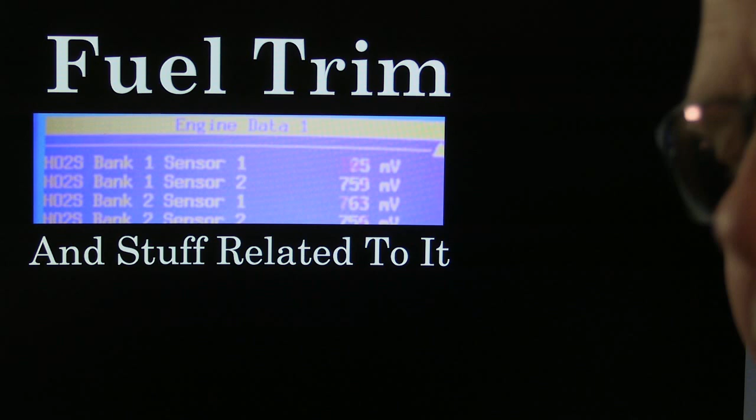This week I decided to do a little presentation on fuel trim and some related stuff. Fuel trim used to be called block learn and integrator. Block learn used to be long fuel trim back in the day - they didn't call it that, but they called it block learn. What we call short fuel trim these days used to be integrator. That goes way back. But the simple fact is that the integrator and block learn, and the short fuel trim and long fuel trim, you cannot measure those anyway except with a scan tool. You have to have a window into the computer's thought process before you can figure out what those things mean.

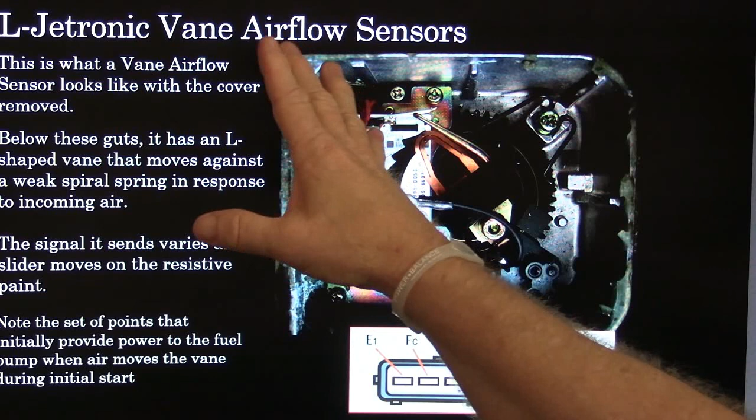Now, some of the earliest fuel injection systems I got involved with - this is a Nippon Denso, on an '85 Toyota vane air meter. This spring-loaded flap has a calibrated spring. There's an L-shaped flapper that air goes through underneath all this, connected to this wiper, and as air comes in it moves this way. You might notice this little rod has points - those points actually drive the fuel pump. When you start spinning it over, this moves just enough to let those points close, the fuel pump kicks on, and you're basically getting something like a throttle position sensor, only measuring airflow. They call this L-Jetronic because the vane was shaped like an L, presumably.

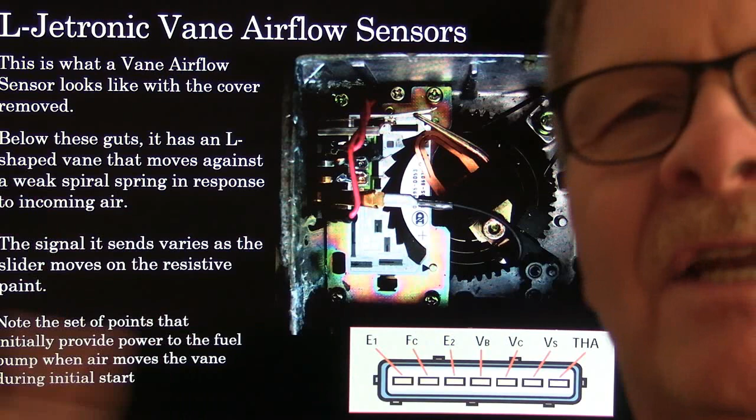I had pulled the top off this - actually somebody had already pulled it off, so it was easy to lift off. This was on a Toyota we were working on that had a strange idle problem. According to the measurements I got and the Toyota book, this wasn't reading right, but when I checked the cost - this was 20 years ago - one of these from Toyota was $800. So I said we didn't need to buy that, and we found the problem somewhere else. If you just went by the numbers in the shop manual, we would have replaced this. But we found it was a coolant flow problem through the idle air control valve, which Japanese vehicles for years - some still do - used hot coolant running through a wax pellet along with an electrical circuit for idle air control, making for like a $500 idle air control unit.

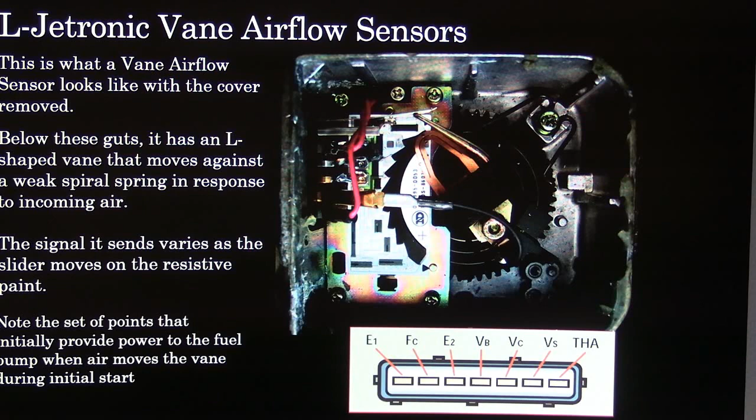This slider, as it goes up, increases the voltage, which helps with your fuel injection and all that. The set of points that provide power to the fuel pump, once again, are right there. So if you're going to unplug this and run the vehicle, you have to bypass the two terminals - jump power to the fuel pump by bypassing them. I don't remember which terminals these were or how this little code works - you've got to have the book in front of you before you'll know what each one means.

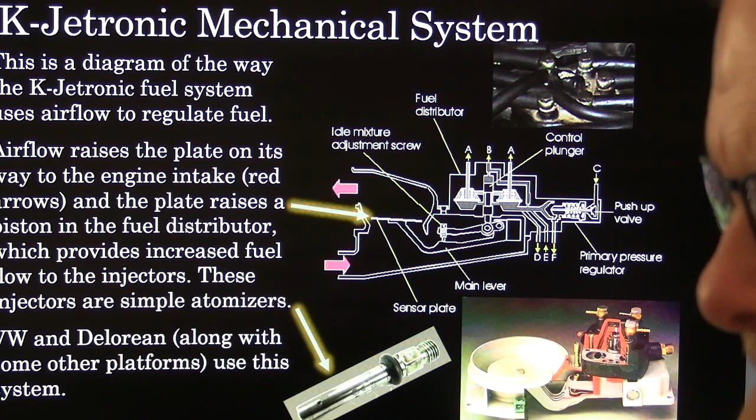Now this is a diagram of K-Jetronic fuel injection, which uses airflow to regulate fuel. It's totally a mechanical system, initially came out in the late 70s as I remember, on the Volkswagens, and I was working at the dealer on these. DeLoreans have this kind of system too, in case you're ever wondering what a DeLorean has for a fuel system. This fuel distributor - if you ever take one apart and put it back together, you're never going to get it to seal up or work right. Those things are assembled in a laboratory, and the tolerances are in microns - it's incredible. Those little slits in the tube that the valve slides up and down in have to be cut with a laser. I don't know how else they'd cut them.

But the simple fact is, this plate right here has a little piston sitting on it. As the air comes in and raises that plate, it raises the piston, and that sends more fuel out. These little atomizers are pretty cool - see the big fat O-ring on there?

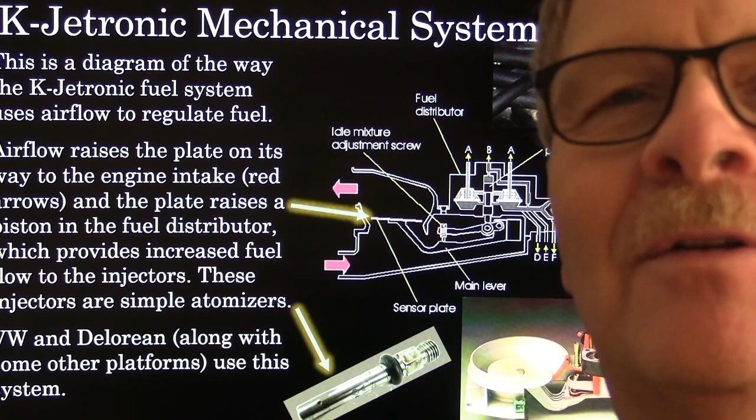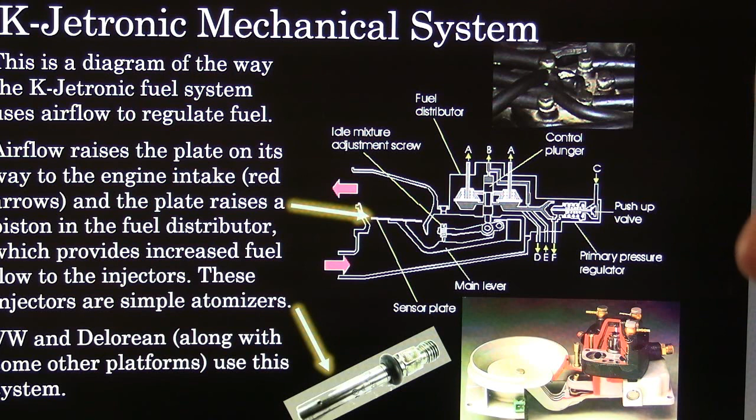They just snap into a little plastic piece that's screwed into the head right there. It's real easy to pop them out and snap them back in, and put a little motor oil on the O-ring. That O-ring keeps it from having a vacuum leak. You could actually pull those out and put each one in a bottle, operate the fuel distributor with the fuel pump running, and watch the fuel. It's a constant mist, not like your old GM system with the poppets.

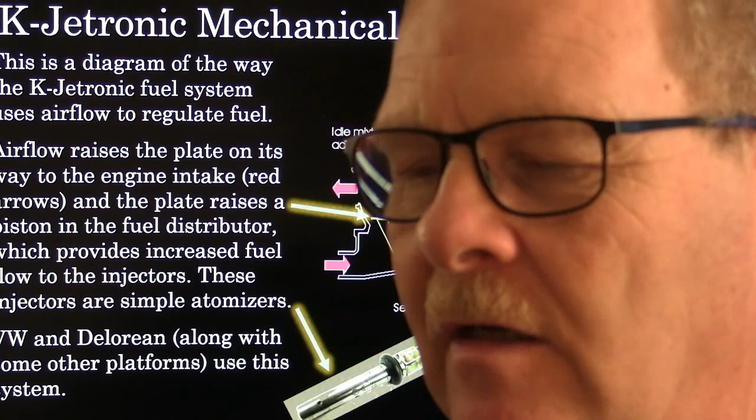There was a little adjustment right here, the adjustment screw. What we would have to do on Volkswagens—well, nope, I got that crossed up with the one that's got the vane airflow meter on it. Scratch that. On the one with the vane airflow meter, you would do adjustments on it until you were reading 1% carbon monoxide, which sounds like a lot, but back then it wasn't all that much by the spec.

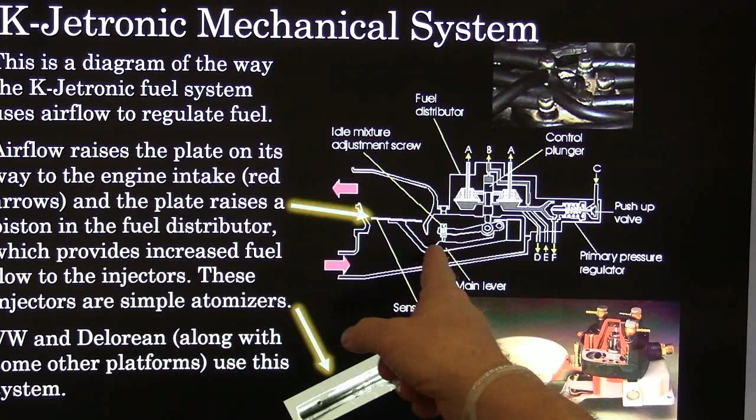But this little mixture screw right here, you'd pop a little plug out, and it was usually an Allen—they show a screw there, but it was an Allen—and it's right here, see that? It goes down in there. So anyhow, that's how that kind of thing worked. I kind of enjoyed working on those. They were a lot of fun.

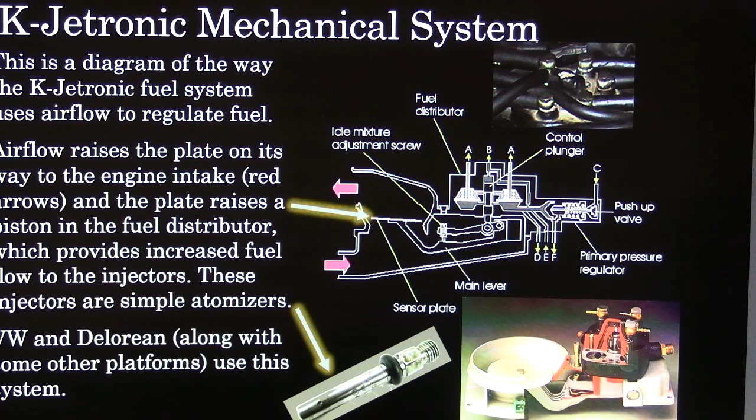This is the way they were wired up. They had a warm-up regulator, which was basically a bimetal thing. You see how this fuel is going in on top of that piston? Whenever the warm-up regulator was cool, it would have lower pressure to counteract the upward motion of that piston as raised by that plate, and that would let it run a little richer. As it warmed up, it would increase that pressure to counteract it. It's almost like in a transmission, line pressure or governor pressure pushing back and forth against each other. That's why you see that warm-up regulator like that.

But you've got an auxiliary air regulator made in a very similar fashion, and it would let extra air go around the throttle plate when the engine was cold until that little bimetal strip warmed up and closed it off. That seemed awfully mysterious to me until I got a little training on it.

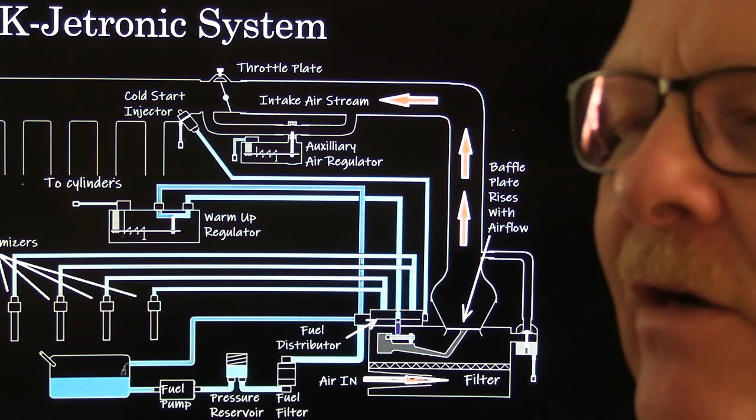Here's your cold start injector, which is there for that extra fuel I was talking about a couple weeks ago that you need for cold start—it does the same job the accelerator pump used to do. That was before they figured out they could put extra fuel in there other ways. A lot of vehicles had a cold start injector to make it start better. There's your little atomizers coming out of the fuel distributor. So this came in, raised that up, pushed that little piston up, and let more fuel go through those metal lines, which were braided metal lines too.

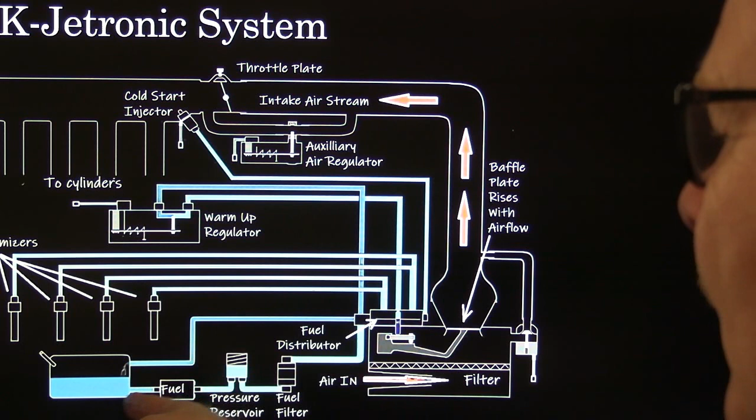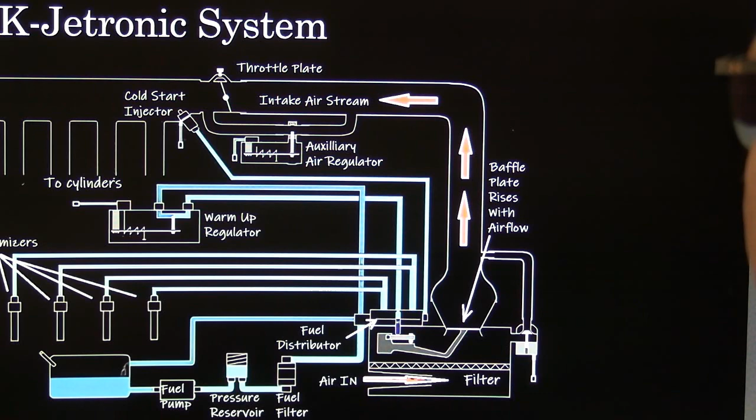They're really made well. Now you had a pressure reservoir here, which was kind of like an accumulator, and a fuel pump. Notice how they like to feed that fuel pump with gravity—they put it down low so it can be gravity fed from the tank. And then there's your fuel distributor right here, which is that thing I was showing in that other slide earlier.

All right, now today's mass airflow strategy. Mass airflow has priority on this particular system. The MAF system doesn't need to know anything about throttle position, exhaust gas recirculation, EGR flow, or any of that—it's just basically reading air.

If these things get dirty so that they can't respond quick enough to that air, you're going to have sluggish acceleration. I've had vehicles come in and they said it's not accelerating right, and I would just spray that and clean it off, and everything would be crisp again. A lot of people clean those.

The thing about it is they shouldn't get dirty if you're changing your air filter regularly, because the air filter filters the air that's going across these, and if there's crud on those, there's something getting past the air filter, and that indicates the problem right there.

Now they've got a cold wire that keeps track of the ambient temperature, and a hot wire. The sensor heats above that ambient temperature to maintain a constant temperature above the temperature of the cold wire, usually 300 degrees Celsius or something like that. And the mass airflow signal is calculated based on how much current it takes to maintain the temperature differential between the cold and the hot wires. There's a whole bunch of different ways they look, but that's just one of them.

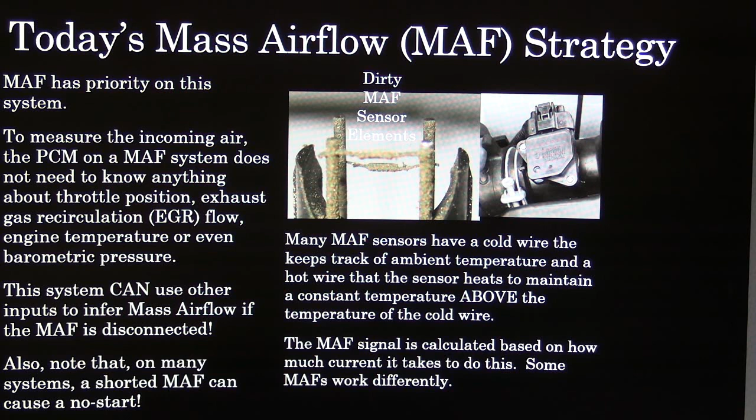And some of your diesels now have got mass airflow sensors on them too. This system can use other inputs to infer mass airflow if the mass airflow is disconnected, but I've seen shorted mass airflow sensors completely shut the system down where you'd have a no start because of the mass airflow.

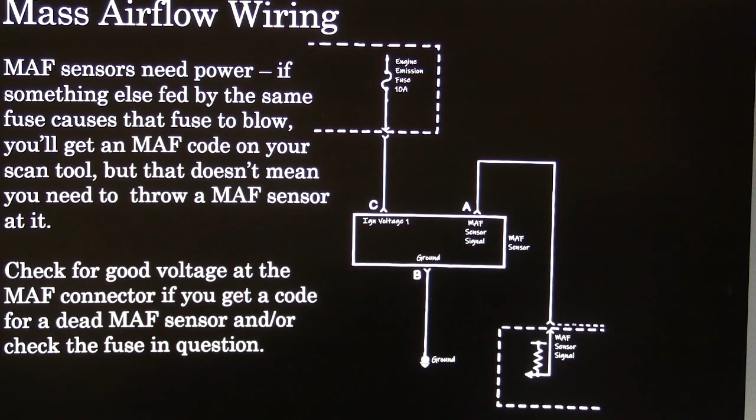Now they need power. If something else fed by the same fuse causes that fuse to blow, you'll get a mass airflow code on your scan tool, but that doesn't mean that you need to throw a mass airflow sensor at it. Case in point, we had this Chevrolet pickup, had mass airflow on it, had a mass airflow code on it, and we replaced the fuse, and it popped as soon as you turned it on.

Now there's power going to the 12 volt power going to the mass airflow sensor. And so I put my little circuit breaker on there with a light bulb wired parallel to the circuit breaker, and it would go ding ding ding ding ding ding. And whenever we would unplug everything we found that was fed by that...

When we got to the downstream oxygen sensor on bank number 2, which was the right hand bank on that Chevrolet, our short went away. It turned out we had a shorted out oxygen sensor heater that blew the fuse, but we were getting a code for a mass airflow sensor, so don't fall in a trap like that just because you're getting the fuse blown.

If you've unplugged the mass airflow sensor and it still blows the fuse, and you looked at your wires, you need to start unplugging other components. I always like to do the easy thing first, but we wound up putting an oxygen sensor on that one to fix the mass airflow sensor code.

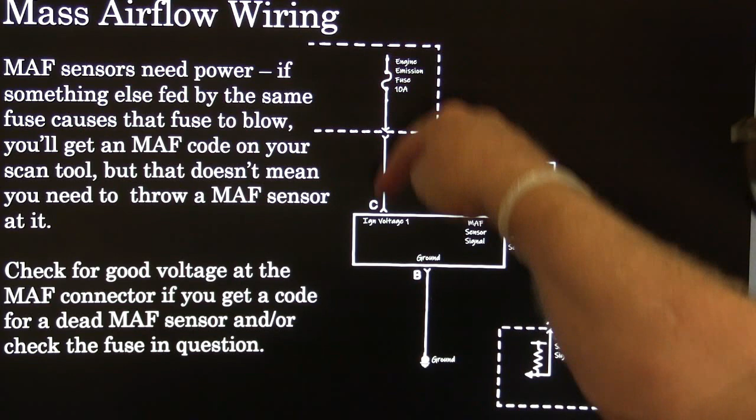Check for good voltage at the mass airflow connector if you get a code for a dead MAF sensor, and check the fuse in question. This is a very simplified schematic I put together of that. Ignition voltage, mass airflow signal coming in, and ground coming in from the bottom. That's really the way I think that ought to be drawn.

Now, unmetered air leaks refers to any air that enters the engine without first passing through the mass airflow sensor, like we do here. We talked about that last week.

The PCM figures fuel delivery based on mass airflow readings. Any air that goes in there that's not going through the mass airflow sensor is going to cause it to put not enough fuel in there, and your fuel trim readings are going to go positive. So it's going to be an out of balance fuel mix because it's going to pick it up as a lean condition. Basically, that's why your fuel trims will go to the plus side of zero when you're looking at your fuel trims.

It'll start out, the short fuel trim will go first, and then the long fuel trim will follow it. If the short fuel trim kind of maxes out, the long fuel trim keeps going up. A lot of times, though, if you go in there, you'll see the short fuel trim on 0 and the long fuel trim at like 28% or something like that. That means the long fuel trim has adaptive learned to the point that it has the short fuel trim back on 0 again, that's its desire, to keep that thing running really clean, even though it's having to twist it way out of balance to keep it there.

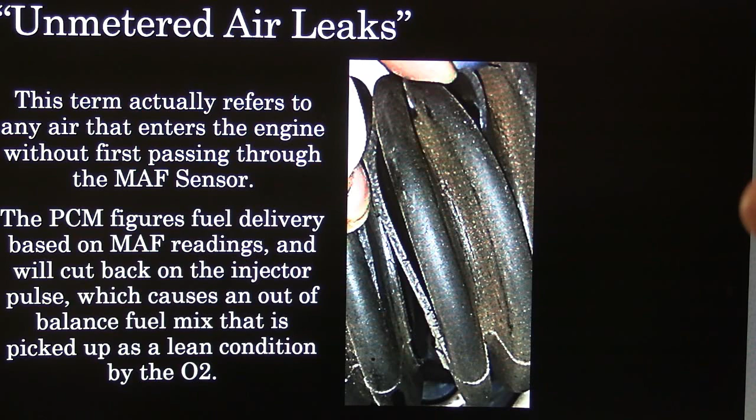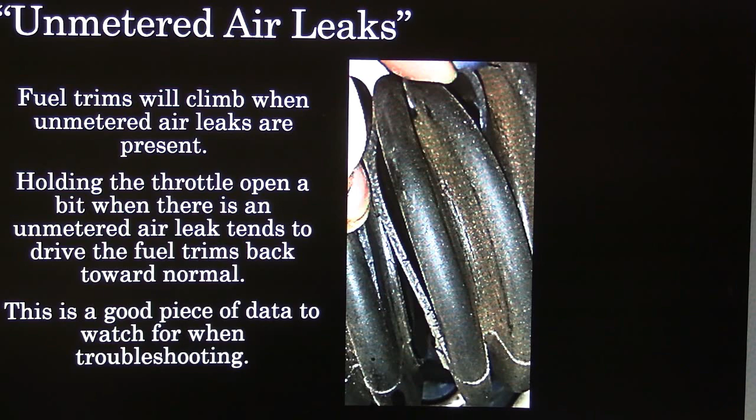Pay attention to these things and other leaks between the mass airflow sensor and the throttle body. Any air getting in there that's not being run through that mass airflow meter is going to cause a problem with your fuel trims. They'll climb when unmetered air leaks are present. It's like holding the throttle open a bit when there's an unmetered air leak, and that drives them back toward normal usually. It's good data to pay attention to.

The PCM can only change the amount of fuel in the mix. The incoming air may be altered by a clogged filter, but on some vehicles, like some Lincolns and this Lexus SC300, whenever you start spinning the wheels, their traction control system kicks in. You can barely see it, but this is a throttle plate down on the bottom that opens whenever you open the throttle with your foot.

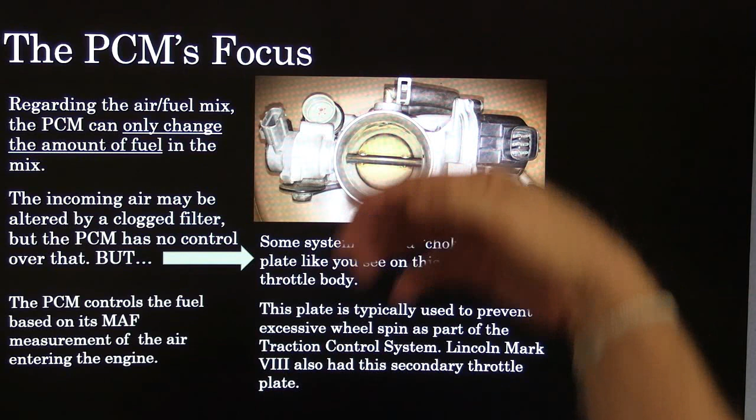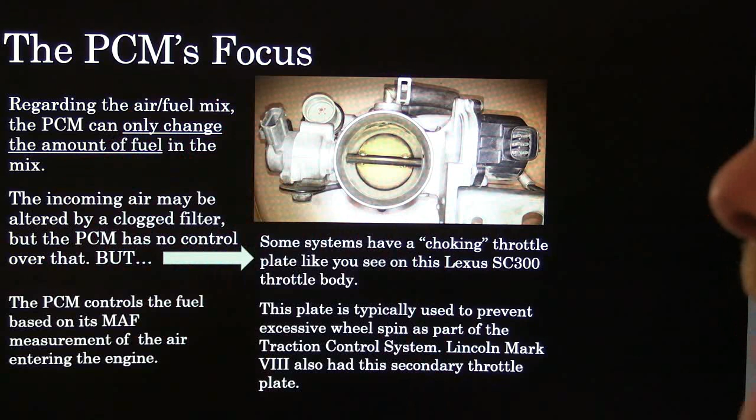If you get that thing spinning its wheels and the electronics pick up on that, this throttle plate you see right here, looking straight at you - I should have had it turned so you could see it better - will begin to close off and stop your airflow, or regulate it automatically so you're not spinning the wheels too much. It controls fuel based on its mass airflow measurement of the air entering the engine, though. That was something I thought was very interesting, that Lincoln and Lexus both do that. If you guys know of another one that does that, let me know. Those are the only two I've personally experienced with that secondary throttle plate that closes off if you're doing something naughty.

Why do fuel trims go positive when the oil filler cap is removed with the engine running? If you pull that oil filler cap off with the engine running and you're watching your fuel trims, you'll see those fuel trims immediately start to climb. The reason is it starts to read lean because the PCV system is pulling air out of the crankcase all the time.

The little breather hose is downstream of the mass airflow sensor, and the air that goes through the mass airflow sensor is filtered and clean because it's already gone through the air filter. This one doesn't have a separate crankcase filter - it uses the air filter for the crankcase filter too, which is really smart. It pulls that air through the crankcase to get rid of the blow-by from the piston rings and out into the intake plenum, and then it processes it.

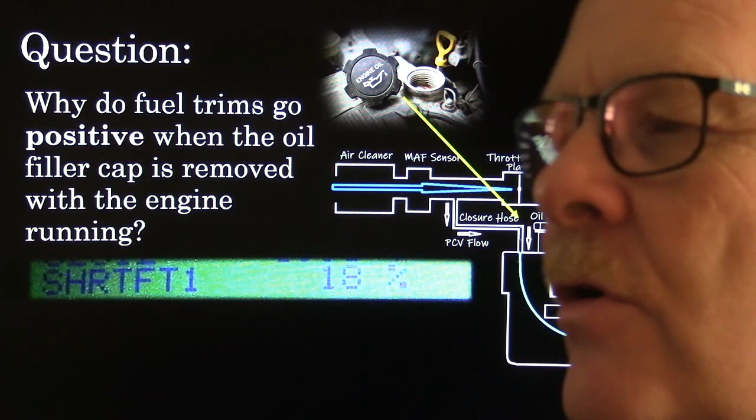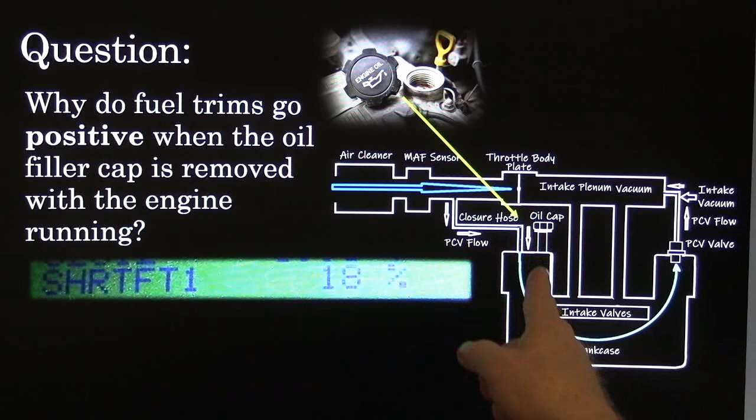The PCV system is the oldest emission control that I know of, and it first appeared in the early 60s on Corvairs. Now, this situation happens because when you take that oil filler cap off, air is going to be coming in there. The PCV system is going to be pulling air through the oil cap opening, and that's going to cause the fuel trim to climb.

So here's something to consider: if you've got an oil filler cap with a damaged seal so air can leak past it, or sometimes the seal has just come off, people feel like if oil's not splattering out, they can just screw it back on and be alright. But I've actually seen some engines where, because of the way the system is designed, if somebody leaves the oil filler cap off by accident, it will throw every last bit of the oil out of there and lock the engine up. That doesn't happen on very many platforms, but I've seen a couple that will do that.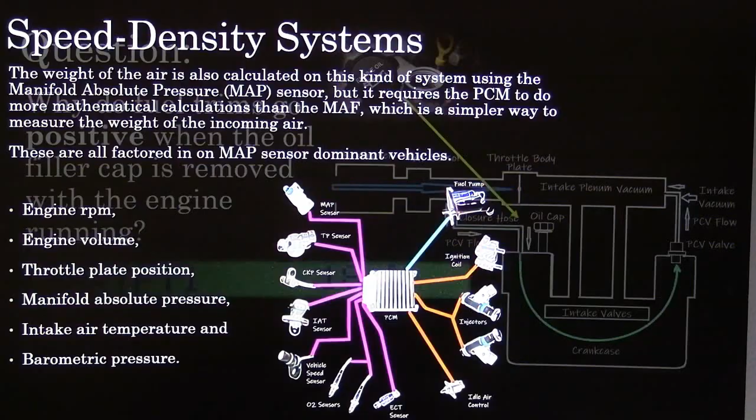On a speed density system, the weight of the air is calculated using the manifold absolute pressure sensor, or MAP sensor, but it requires the PCM to do more mathematical calculations than mass airflow, which is a simpler way to measure the weight of the incoming air. These factors are all used on MAP sensor dominant vehicles: engine RPM, engine volume, throttle plate position, manifold absolute pressure, intake air temperature, and barometric pressure.

Engine coolant temperature is not listed here, but it's factored in too - I just fooled around and didn't put that as one of my bullet points.

But the thing about it is, intake air and engine coolant are always going to be factored in anytime you're running the engine on any of them, mass airflow or MAP. They're always going to modify the pulse width. Barometric pressure will always modify the pulse width. Throttle position and how fast you're opening the throttle will have something to do with that too.

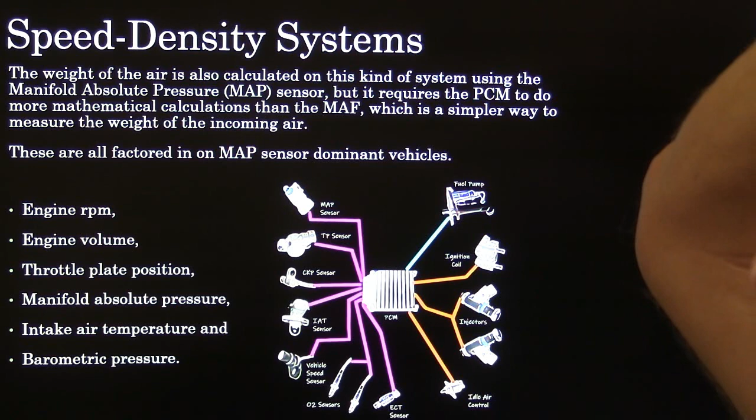Engine volume means engine displacement, it's volumetric efficiency. Like your 3-liter engine is supposed to, if you turn the crankshaft 2 turns, you're supposedly moving 3 liters of air through there, but that's not the way it is because the air's got to make so many curves going through there that your volumetric efficiency is not going to be 100% unless you're running a supercharger or a turbocharger. Of course, RPM's got something to do with it too.

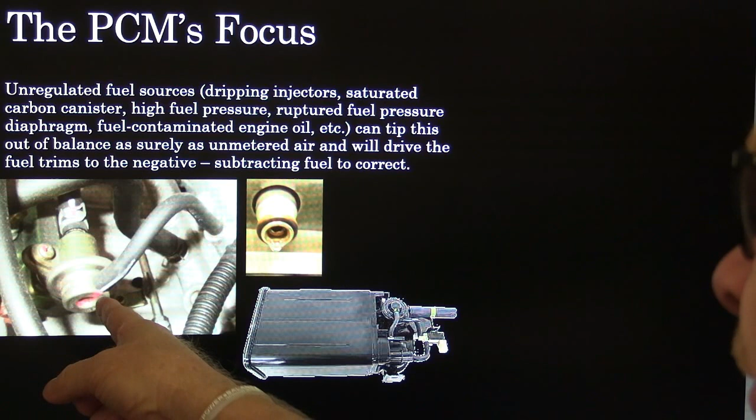Unregulated fuel sources, which is dripping injector, saturated carbon canister, high fuel pressure, ruptured fuel pressure regulator diaphragm. If you pull that hose off that fuel pressure regulator and there's fuel in it, that diaphragm is ruptured, and if that gets bad enough, it can actually hydraulic lock a cylinder. If enough fuel pressure keeps trickling in there, like on a hot day, you've parked it, fuel starts going into the intake manifold, there's an intake valve open, it starts dripping fuel in there, and if it gets enough fuel in there, I've actually seen this happen before, an engine was destroyed because this little diaphragm busted and it leaked in there.

And of course, if you got a saturated carbon canister, because somebody topped off the gas or whatever, it's also going to make it run rich. Dripping fuel injectors will typically be more likely to cause a hard start problem than they will a rich running problem. If you've got engine oil that's contaminated with fuel, it's going to be pulling through the PCV system. It's going to pull fuel vapors, and that's going to skew your fuel trims.

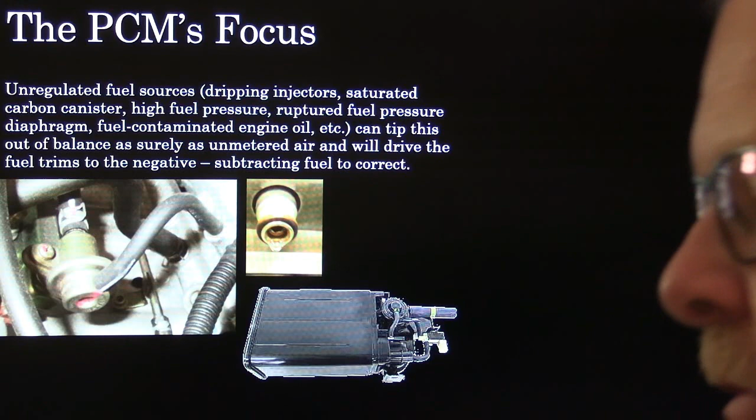One of the things they used to tell us in the very old days on Fords was, if you have one that's reading rich, the first thing they want you to do is pull the PCV valve out of there and put a piece of paper over it. If the fuel trim normalizes, that means that you need to change the oil before you do anything else.

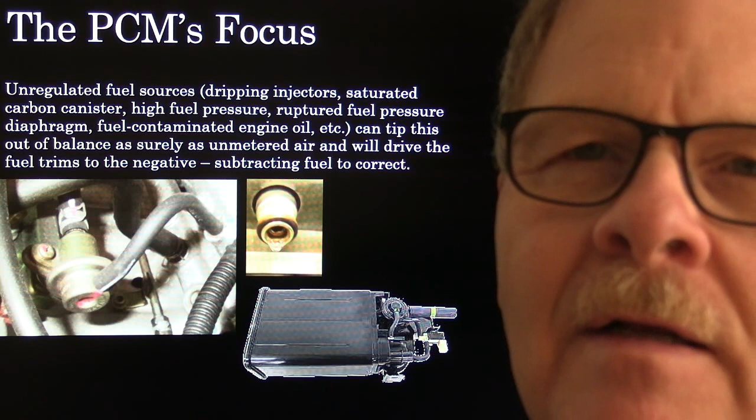Because sometimes you have enough fuel contamination, even if there's nothing else wrong with the vehicle, if you have gone a long time without an oil change, a lot more than you should have, you're going to have fuel contaminated oil. Basically, it's going to depend on the driving habits of the person that's driving the car and all that. But it's really kind of crazy to throw a bunch of parts at one when an oil change would have straightened it out. A lot of times you're looking for a reason for a check engine light code whenever you're doing this anyway.

Short fuel trim is an instantaneous fuel pulse width adjustment to what the O2 sensors are telling the PCM. The long-term fuel trim is the adaptive memory part of the picture, and follows short fuel trim, which makes coarse adjustments. In other words, the long fuel trim makes coarse adjustments for the fuel delivery when short fuel trim, which is instantaneous, wobbles too far out of line.

If short fuel trim goes up, and it's going up too fast, and it can't correct the concern, the oxygen sensors are still reading what they were, then the long fuel trim starts to ratchet it up in steps, and it happens a lot slower.

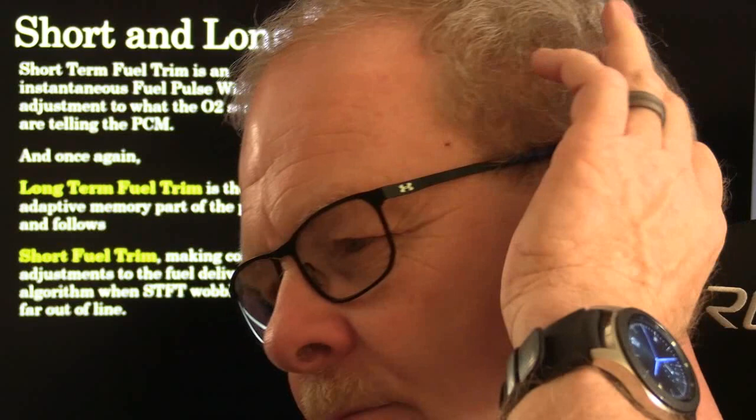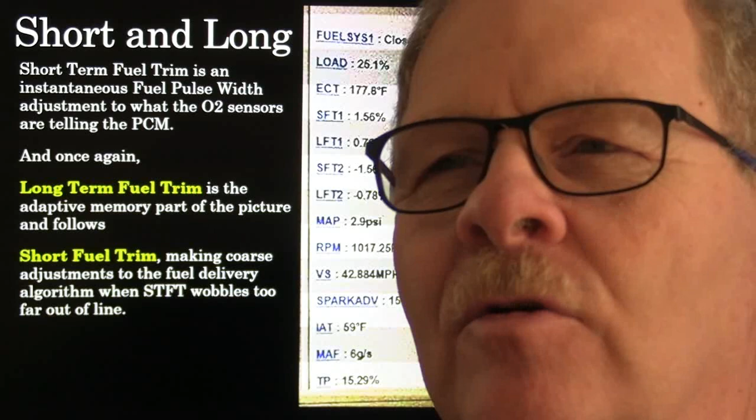See, this one right here, you might notice has basically got mass airflow and MAP. Now, what you're looking at with MAP, a lot of times you'll read on the scan tool, it'll say intake manifold vacuum and manifold absolute pressure. Now, manifold absolute pressure, when you add it to the intake vacuum reading, is going to give you a figure that's equal to barometric pressure.

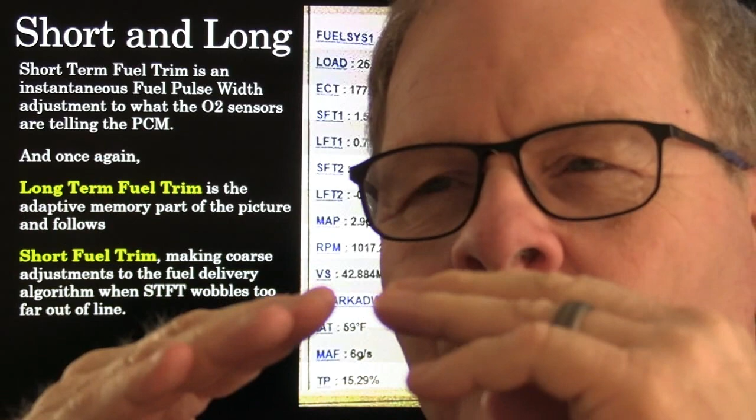Barometric pressure is divided between manifold absolute pressure and vacuum because they're two sides of that same coin. It's a seesaw.

Short fuel trim 1, this is like a 2-bank engine. Long fuel trim, see how this is really close to 0? This is like it's supposed to be running. That one's just below, this one's just above, this one is just above, that one just below. Notice how they're both floating along there together. There's your RPM, that's a little more than idle. You've got just a little bit.

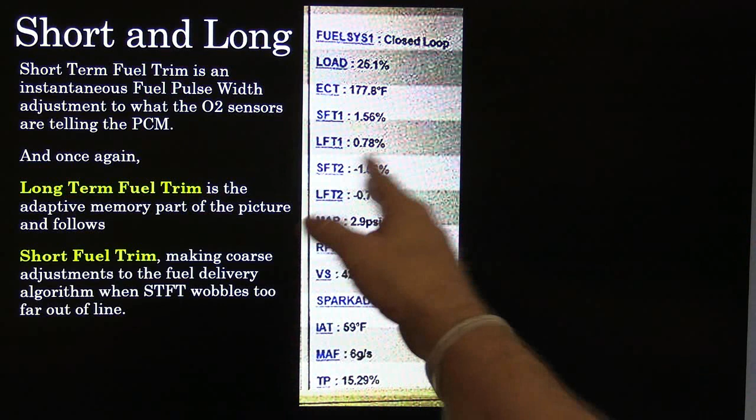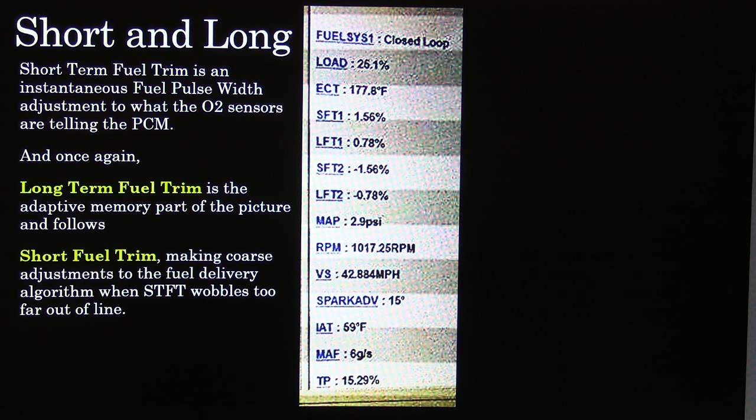Your closed loop fuel control is important too, because if it's not paying attention to the oxygen sensors, then your fuel trims are going to be figured by something other than the oxygen sensor. We're driving 42 miles an hour here too. Spark advance at 15 degrees. All right, that's about all I got to talk about there.

Engine coolant, you notice, is 177 and intake air temperature at 59, which is what you expect in a normal situation. You won't always see the problem with a scan tool.

Now, there's a lot of people that like to spend a lot of time enjoying the cool AC with the engine running, sitting in the car, pretending to look at the scan tool screen. There's only so much you can figure out that way, and pretending to work on the car while playing on your phone is not helping either. I used to have to tell my students about that.

There's an exhaust restriction downstream of the catalyst, like an internally damaged muffler with a baffle blocking its outlet, so the engine can't breathe out. Can we find that with a scan tool?

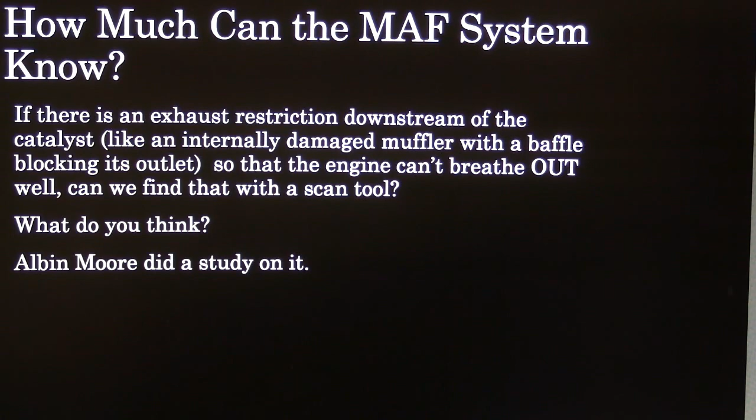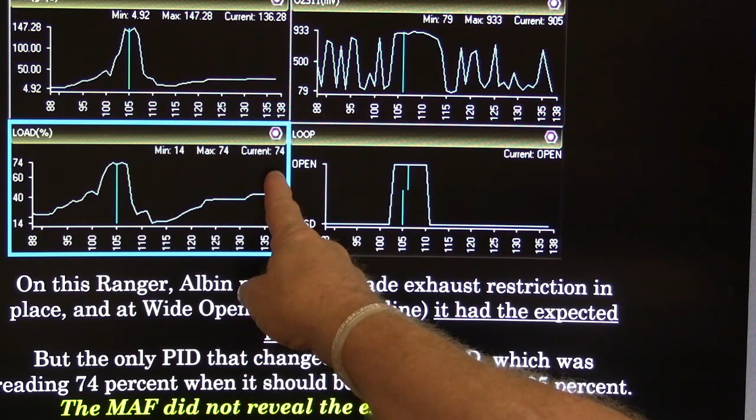What do you think? Albin Moore, he writes for Motor Age, just like I did, has done a study on that. He put a man-made exhaust restriction in place on his Ranger, and at wide open throttle, looking at that line, there's your wide open throttle. It didn't have a lot of power, which you could feel that, but you really couldn't see it here. The only thing he could see here that was any different than when he didn't have a restriction was that there was a 74% reading on your load rather than 95%. That's the only difference that he saw.

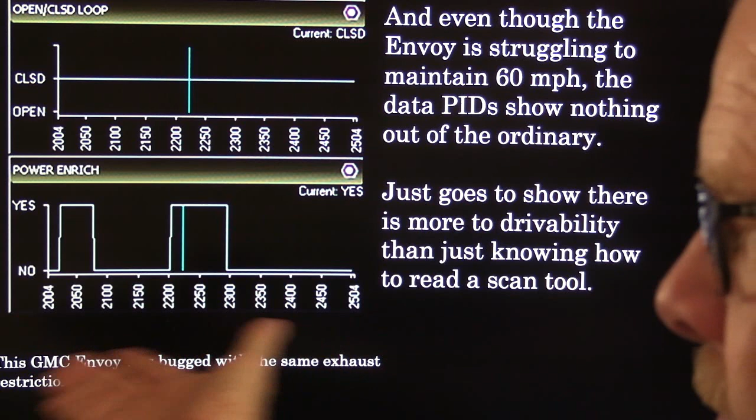Now, even though this Envoy, this GMC Envoy, he bugged the same way, it was struggling to maintain 60 miles per hour. The data PID showed nothing out of the ordinary. Just looking at your data, you could not look at your data PID on these and tell that it had a clogged exhaust. All right, look at that one right there.

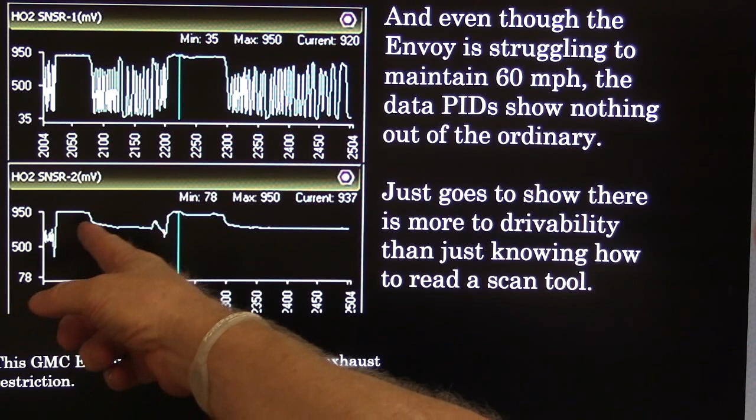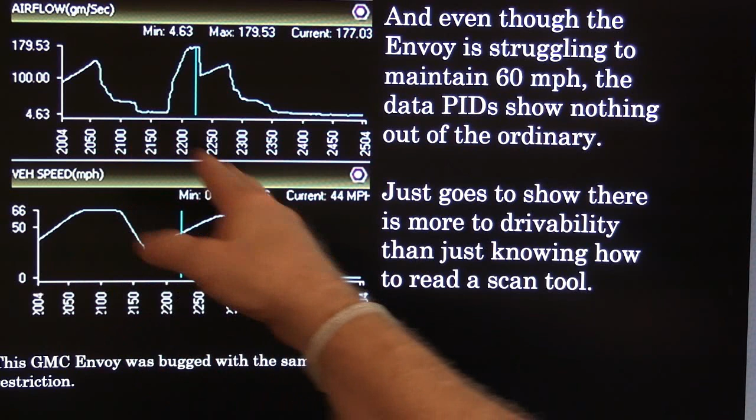All right, and you might notice he actually got a transmission shift out of this. When you see this, this is a transmission shift. That's how that was. He went on up through there, and then he let off, and he let it come back down. See, he basically was coasting, and then he came back down to speed.

But the simple fact is, if you think you're going to sit there and look at a scan tool screen and tell everybody exactly what's wrong with it -- now Mac Vandenbrink, whenever he was teaching his scope classes, he could show you how to find a rounded off camshaft lobe looking at the ignition pattern. And that's really some high-end stuff.

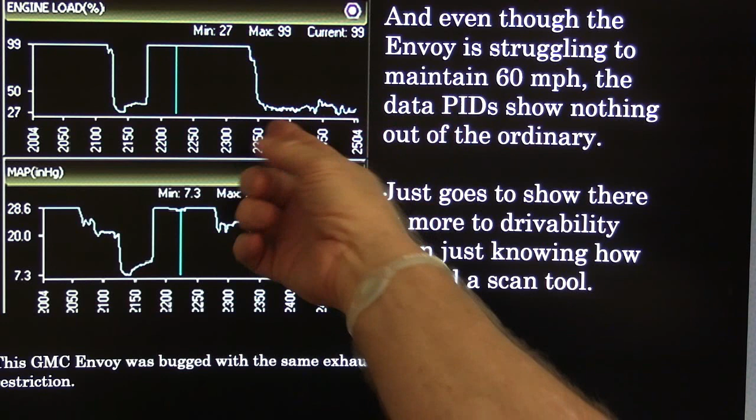But here, by the way, his engine load was 99% on this one, and the MAP was reading at 28.6. The manifold absolute pressure was real close to barometric pressure because he was just pushing it all the way down.

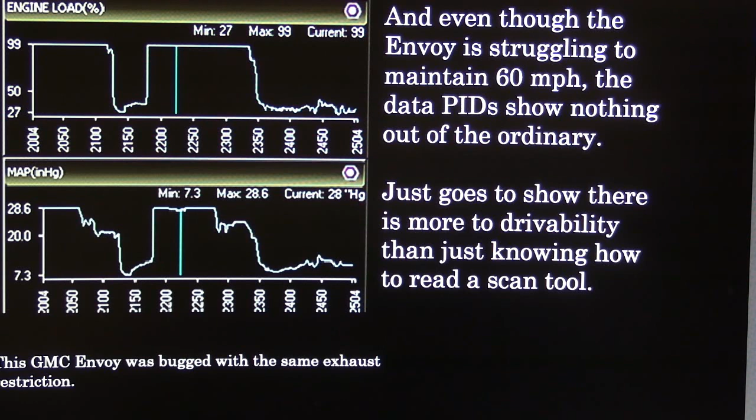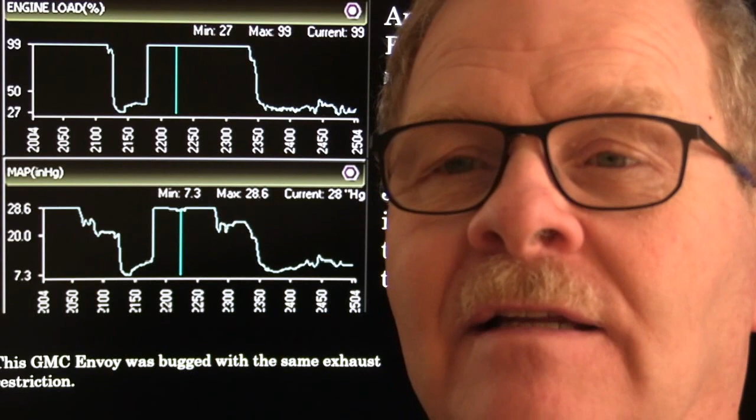The smartest thing to do, though, if you're fooling with a scan tool or scope or anything else, is get used to what normal patterns look like and get those in your mind so you know exactly how they're supposed to look. You might even store some patterns you can go back and make reference to. If you're just looking at squiggly lines on a screen, I found that out when I started using the Service Bay Diagnostic system back in the early 90s. If you're just looking at the screen and you're saying, well, what am I seeing here? I mean, I see lines and I see what's happening, but I don't know how it looks and when it's a normal car.

One time there was this Ford Contour I was looking at that had a harsh transmission shift. So I made a recording and saw these lines on the screen. I took the flight recorder and plugged it into another one just like it, since at the dealer you often have two cars just alike. I drove that one, made recordings, brought it back, uploaded it to the Service Bay Diagnostic system, and compared the two graphs to see what the problem was, since I had a good graph and a bad graph. That's really important, which is why so many databases have good and bad cam and crank sensor patterns and all that.

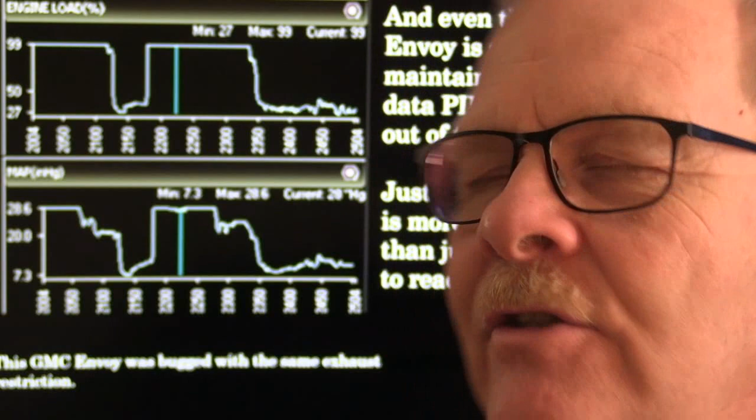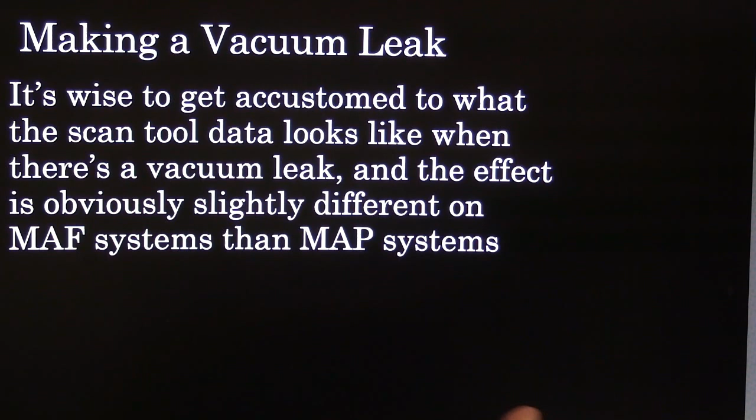Making a vacuum leak: it's wise to get accustomed to what the scan tool data looks like when there's a vacuum leak, and the effect is obviously slightly different on mass airflow systems than on manifold absolute pressure systems.

This blue line is placed at the point where a vacuum leak was introduced. Now look at this—as soon as he introduces the vacuum leak, what did the oxygen sensor do? It bailed all the way to the bottom. Then it recovered because the short fuel trim started ratcheting up really fast. The short fuel trim went up and stayed up long enough that the long fuel trim started taking action to bring the short fuel trim back to zero, which is what it's always trying to do. That's what it was able to do—it brought it back.

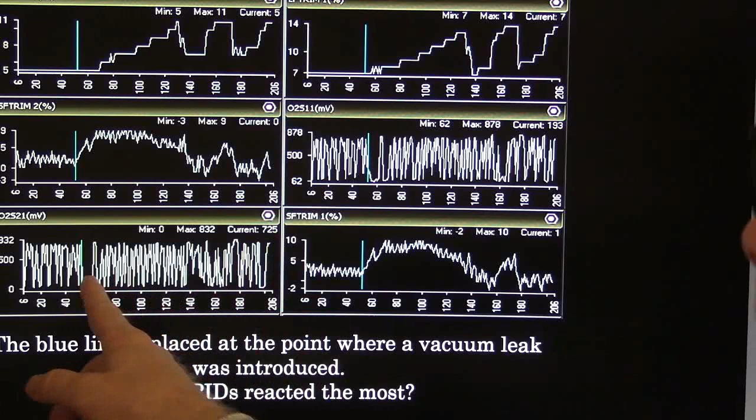Now you notice that oxygen sensor did the same thing, and this fuel trim here did the same thing. Both fuel trims look pretty much the same because the vacuum leak was common to both banks. Now if you had a vacuum leak on just one bank, that's something else.

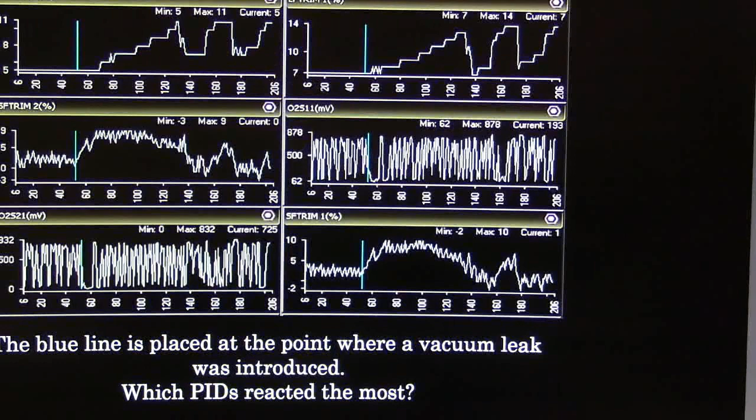I had seen a Mustang one time that a mechanic put back together after pulling the heads off—a 4.6, I think, a Saleen or something. He had the valve timing slightly off, one tooth advanced on one side. What he was reading on his fuel trims was his left bank reading plus 10 and his right bank reading minus 10, because of the way he had timed the camshafts. Whenever he put the camshaft timing back like it was supposed to be, they both balanced out. That was kind of an interesting thing, and that wasn't one with variable cam timing either—it was one of the older ones.

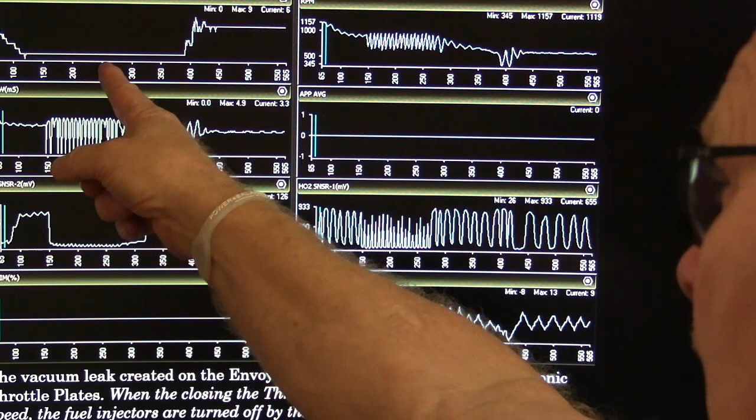Now the vacuum leak created on the Envoy—notice what the PCM did. A vacuum leak is going to cause it to idle faster typically on a fuel injected engine, unless it's a really big vacuum leak right close to one runner; if it's common to the whole plenum, you'll get a faster idle. The engine controller didn't like that, so it closed the electronic throttle body. See how the TPS on this electronic throttle body went down? RPM was doing wacky stuff. Now if the electronic throttle body closes but the RPM stays up, a lot of these platforms will turn the injectors off because they're trying to protect the driver from it running away.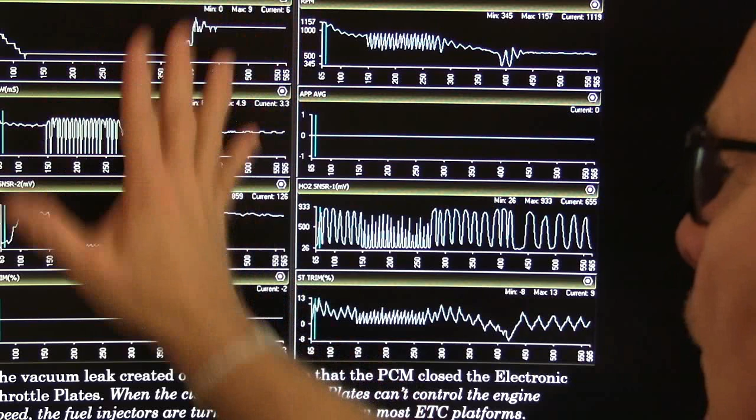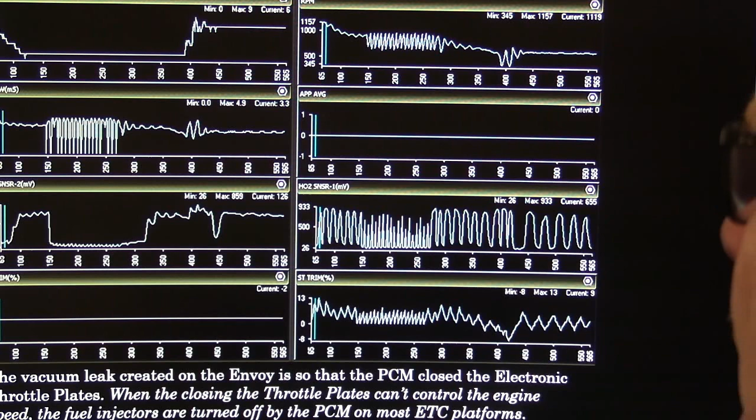You notice how oxygen sensor 2 went down when he made the vacuum leak. It did this and all that, but this is related to other dynamics going on—that's the point. There's your long-term fuel trim, it's at -2. Short-term fuel trim is waggling around here, and you can look at that and analyze these little graphs. It's always a good idea to see what's going to happen when you do one thing or another, just so you can understand how it's thinking.

Back in the mid-80s, Buick, as I remember, came out with coil pack ignition, which was the first time I had ever seen that on a car. Motorcycles had something similar, firing the plug on the intake and exhaust stroke. But Buick came out with mass airflow and coil pack ignition on the same vehicle. This thing wasn't quite perfected enough, and they would start giving trouble.

The diagnostic on those mid-80s Buicks was, if you whacked this thing with something like a screwdriver handle and it bucked and jumped and didn't run right, you were supposed to replace this. They also had a technical service bulletin where they had you add a MAP sensor so it would have that as a backup input in case it needed it.

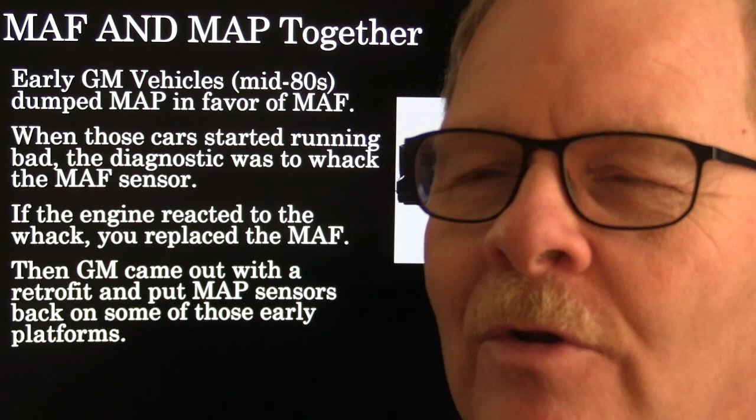That was kind of like in the early years of the Vietnam War. They felt like they didn't need guns on fighter jets anymore, just missiles. The fighter pilots said this is a bunch of hogwash, because if you shoot a plane down with a missile and you're too close to it, you're going to kill yourself too. So they mounted these big 50 caliber machine guns under the wings on those F4s, made so they'd dance around loose but pointing ahead. If you mounted them solidly, they'd rip themselves off the wing. This old fighter pilot who flew those things told me you couldn't see - there was no gun sight. You just had to point your plane at whoever you were chasing, and whenever you pulled the trigger, the guns would waggle around spraying bullets everywhere, and you hoped you were going to hit him.

Many platforms today have MAP and mass airflow sensors. Chrysler products used only MAP sensors to stay away from mass airflow for decades, except the ones they did in conjunction with Mitsubishi. Those Mitsubishi mass airflow sensors were downright weird - super expensive, and some of them had a little speaker on one side.

The air is blowing between these two. They had a little detector and a speaker, and the sound being generated was ultrasonic, you couldn't hear it, and it was basically picked up by the speaker on the other side. So the more air that went through there, the more that sound was deflected. It was a sonic mass airflow sensor, something you'd probably see in like a 92 or 93 Eagle Summit or something like that.

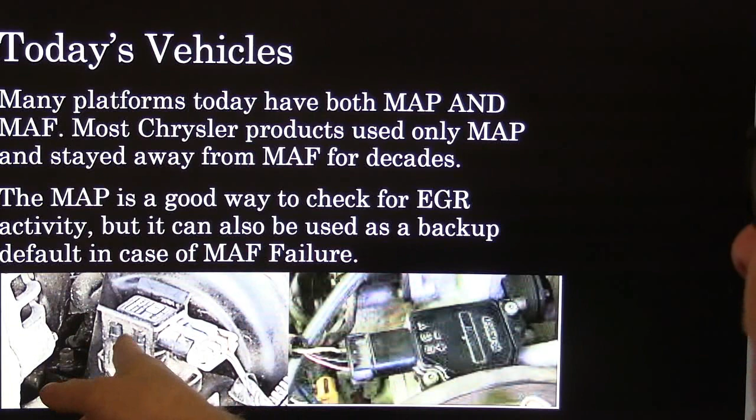Anyway, the MAP is a good way to check for EGR activity. What happens to intake manifold vacuum when you open your EGR - vacuum drops. Also your oxygen sensor - GM used to use the oxygen sensor for feedback to see if the EGR was flowing right, because your oxygen sensor is going to do what? Whenever you displace some of the oxygen with inert gas from the exhaust system coming through the EGR and into the mix, you're basically going to see the oxygen sensor drift up a little bit. That's just the way that kind of works. But it can also be used as a backup default in case of mass airflow failure.

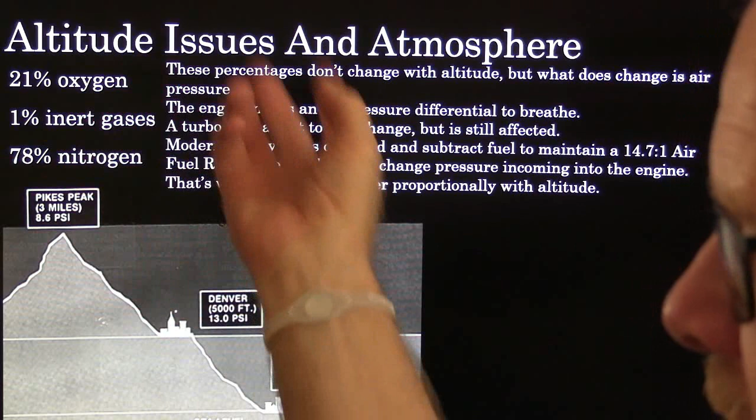Now the engine needs air pressure differential to breathe. As the piston's going down, it creates low pressure and the air rushes in to fill it. A turbo might adapt to that change, but it's still affected. Modern EFI systems only add and subtract fuel to maintain a 14.7 to 1 air fuel ratio - they can't change pressure coming into the engine. That's why engines lose power proportionally with altitude.

It was later in the 70s - I had a 72 Chevrolet, and I went on a trip out there to the Grand Canyon in that 72 Chevrolet, and the rim of the Grand Canyon is about 8,000 feet above sea level. The farther we got into Arizona and the higher that altitude got, the worse that car ran.

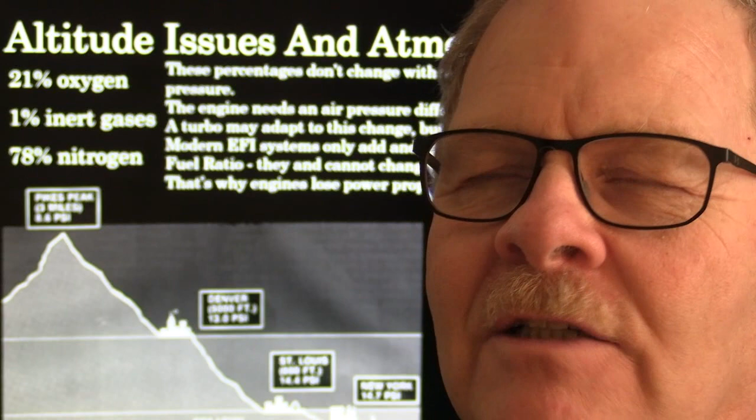Now, if you want to make adjustments to make it run better, you can basically advance the timing and do some carburetor adjustments, because whenever you don't have as much air, you need more time for the mix to burn. So changing the timing and adjusting the carburetor is what you had to do to get one ready for altitude. Now, fuel injection can handle up to 4,000 feet altitude usually without any special modifications.

There may be some now that can handle it all the way up, I don't know. In the olden days, we used to have, if you were going to altitude on something like a Jeep...

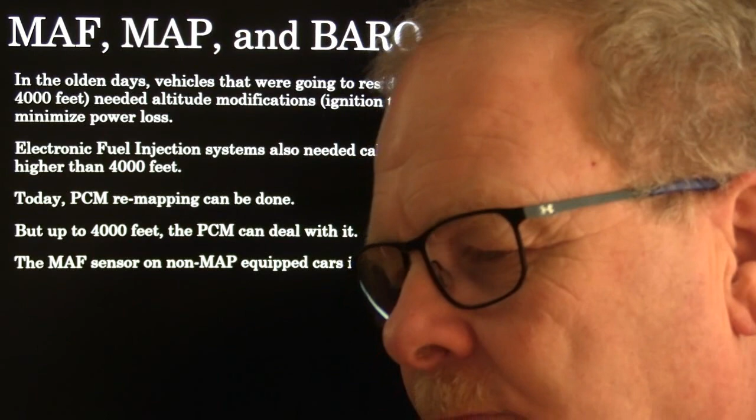CJ, they had a little wire that you were supposed to ground. It was a ground that was hanging there, taped off, and as I remember, it was black with a white stripe or something like that - it was an altitude modification wire.

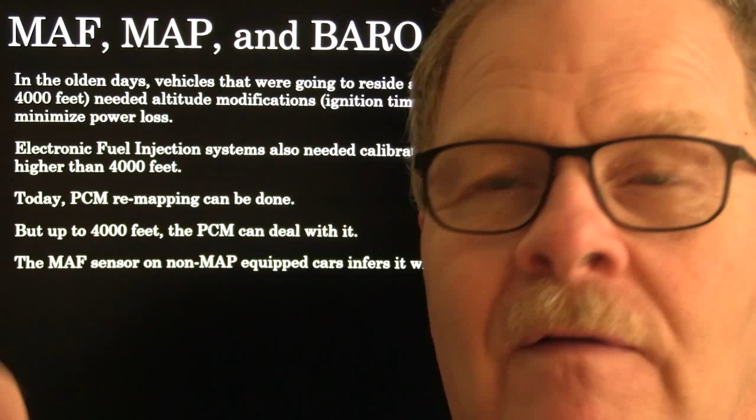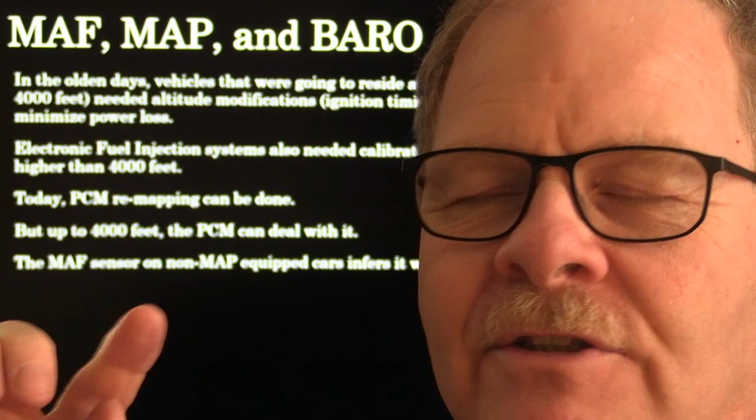Now, the Jeep Cherokees that had that crank sensor back there, with the two ears on it, you remember - I ain't talking about the one that takes a little paper spacer, I'm talking about the one that's got the two ears on it, like on a Jeep 4-liter. For altitude modifications, you had to put a different crank sensor on there, and it was actually in a different indexed spot on the crank, on the flywheel, so you would have about 8 degrees extra timing advance, even at static timing. So anyway, that's just all that stuff you got to do.

Mass airflow sensor on non-map equipped cars infers barometric pressure with calculations. The barometric pressure is calculated by the map sensor. When you switch it on, the map sensor calculates barometric pressure. This is the Ford one that reads hertz.

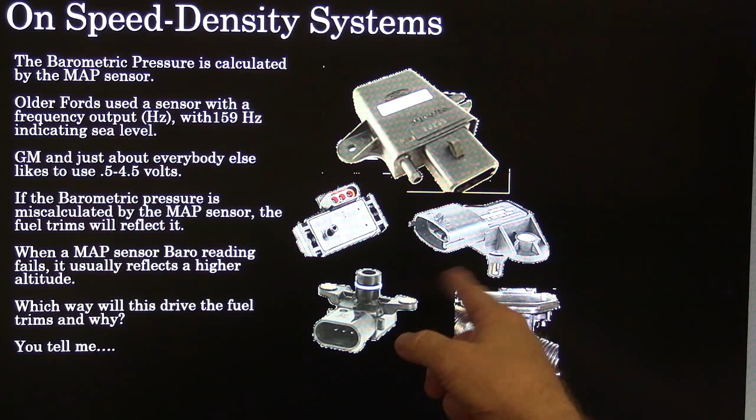You know, there's your old GM one that reads volts, and now that's your mass airflow there. That one there, and this one right here, that may be a map sensor too. But you know, they come all different kinds of ways. Some of them are fed with hoses, some of them go right into the intake.

But the point is, when you switch the key on, you're basically going to get barometric pressure on the way to the start position, and it doesn't take but a second to pick up on that. When you're going wide open throttle going up a hill, it's going to update that barometric pressure reading so it can make more accurate calculations.

Older Fords - this right here - whenever you were at sea level, if you took a meter that read hertz and went into that signal wire coming out, of course they had just 3 wires going there, the signal coming out didn't read voltage, it read hertz. So when you poke that thing in there, you're supposed to read about 158 to 159 hertz at sea level with normal air pressure, and there's no hurricane out there or whatever.

And of course, you need a barometer so you can tell what the local barometric pressure is too, but you can get that on your phone nowadays if you pull up an app. But when you cranked it up, it would be about 110 hertz. And so that was pretty good.

If that vacuum line was off, you would be reading 158 hertz all the time. It would run rich as a dog. Sometimes the vacuum line going to that would be clogged up, or would have some jelly in it that got sucked out of this thing, you know, all those. There's a lot of little problem things you could talk about, map sensors and all that.

So when the map sensor barometric reading fails, it usually reflects a higher altitude, usually - not every time - but this drives the fuel trims. If you find a fuel trim related problem you think you fixed, I'm going to tell you a little story in a minute that's going to answer that question I just asked.

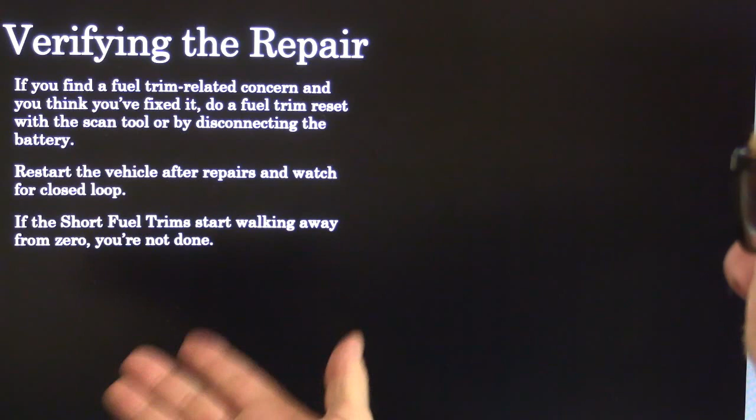If you find a fuel trim related concern you think you fixed it, do a fuel trim reset with a scan tool or by disconnecting the battery, restart it, and watch for closed loop. When it closes the loop, if the short fuel trim stays close to 0, you fixed your problem. If they start walking really fast, you got more work to do.

Now, this guy had fuel trim that was plus 27 - it was adding that much. He tossed an O2 sensor at it, did a battery reset, and went right back to 27, just like I was talking about.

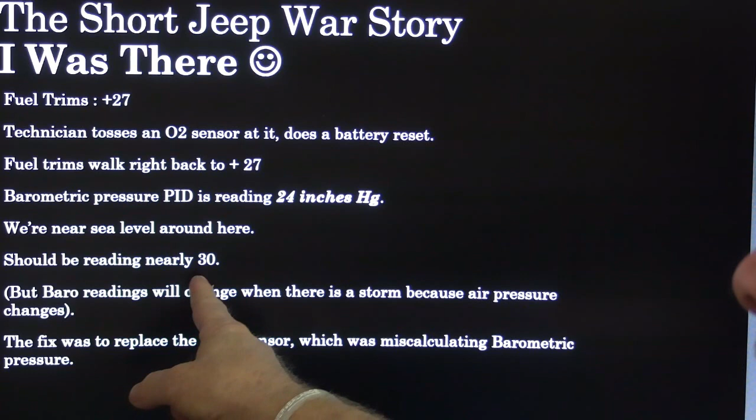Barometric pressure PID was reading 24 inches. We're at near sea level, so it should have been reading close to 30. Barometric readings will change when a storm is there because of pressure changes. And the fix was to replace the map sensor, which took care of the whole problem. That was something I saw when I went over helping my buddy one day.